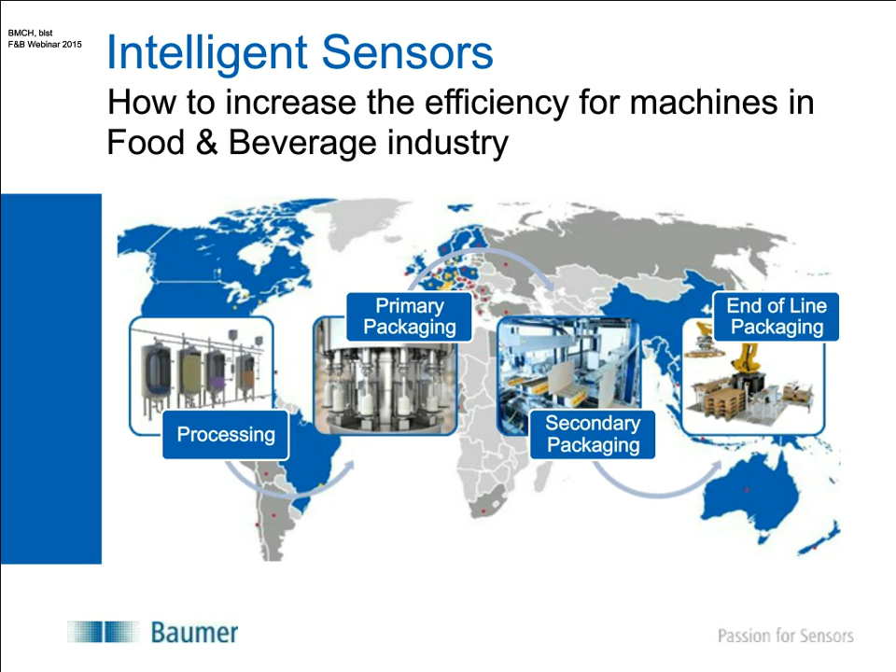During this webinar, you will get an overview of food and beverage, market drivers, the market in general from processing till end-of-line packaging, why hygienic design is so important and how to realize this in sensors. We also show you a dilemma between optimization and food safety, how to improve processes there. And during the webinar, I will also raise a question to you where we would like to hear your opinion.

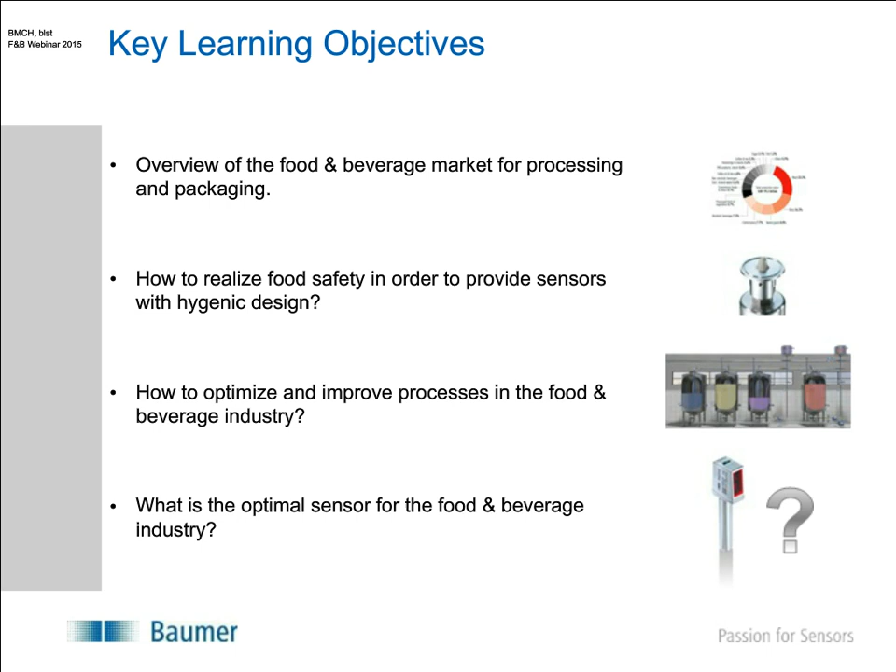But first, I would like to introduce our company, Baumer, with just 3 slides. Actually, Baumer is a sensor manufacturer of positioning and process sensors, as well as encoders, motion controllers, vision sensors, and also cameras. We are based in Switzerland. There's our headquarters, and we have 2,300 employees worldwide. Our turnover is about 400 million Swiss francs. And we have global coverage of the company with over 19 countries and 37 locations.

Baumer's definition of food and beverage is as follows. When we look, for example, on the dairy vertical process chain, we see from the left to the right the farming, the logistic, the processing, the primary packaging, the secondary packaging, the end-of-line packaging, and the logistics. Everything within the green box is, for us, the food and beverage area, which we are focusing on. You see a lot of different applications listed here, storing, mixing, blending, filtration in the different areas. We divide food and beverage into the process area, where the food is being processed, mixed and manufactured, and then into the packaging area, which is the primary, secondary, and end-of-line packaging. Each segment has a lot of different equipment there, and I'm coming later to these applications.

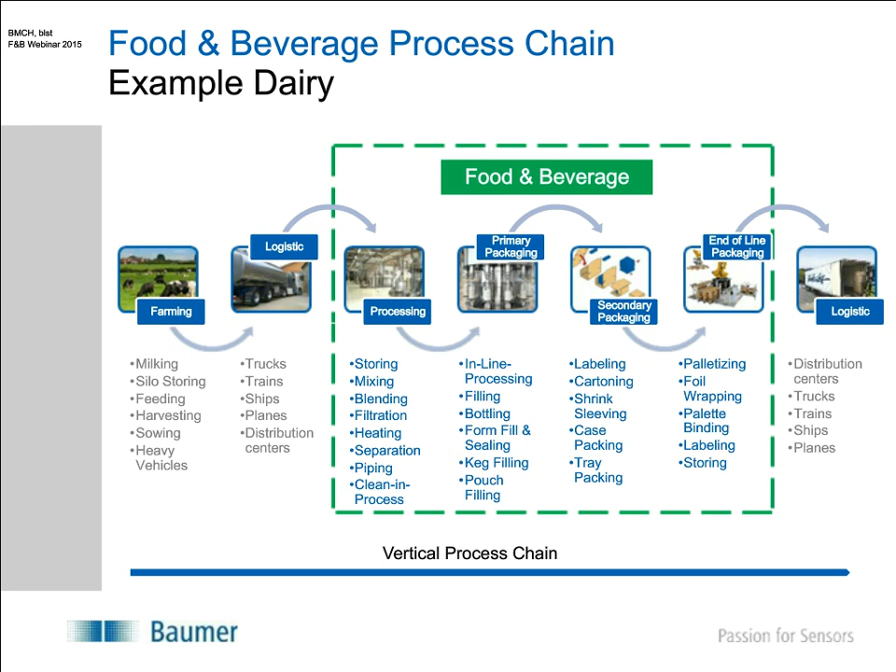But what influences this chain, and where does it come from, actually? Now I'm coming to the next slide, the main drivers in the industry. Here are some main drivers that influence the industry.

For example, since 1950, the world population grows steadily, and the more developed countries, as you can see here on the bottom, have a very slow increase till 2015, and up then stagnation. The less developed countries have a much higher increase. This will be the reason for doubling the population within the lifetime of a generation. The United Nations expects to reach more than 9.7 billion until 2050. That causes a lot of problems, of course, and efforts to feed all of us in the future.

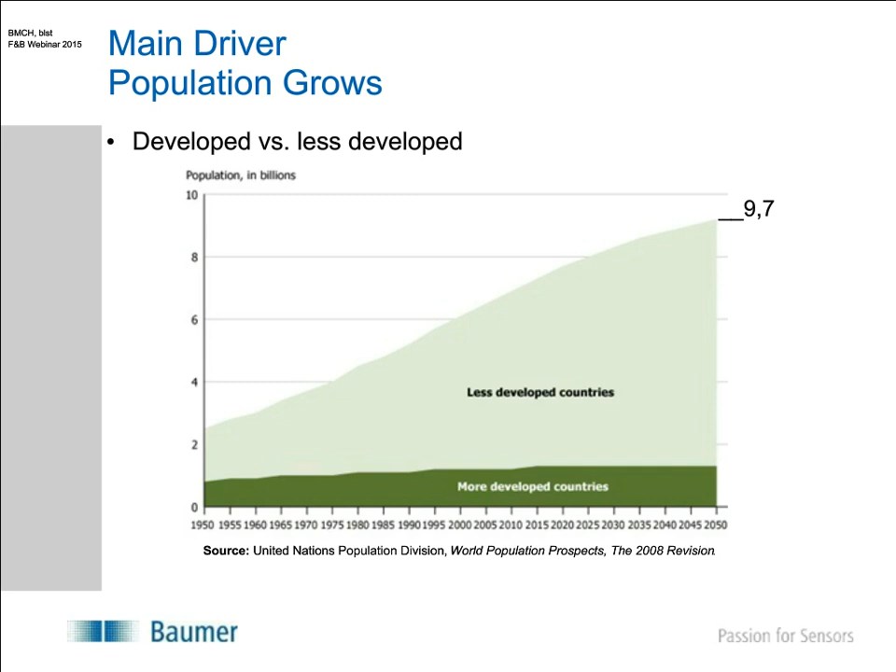So where are the less developed and where are the more developed areas? This slide will show you. Here you see an overview of the population development by regions. It shows clearly in the developing areas a much higher increase of the population than in the already developed regions. That means that we must think about regionally different models and solutions on how we will distribute food and how we will reach the people.

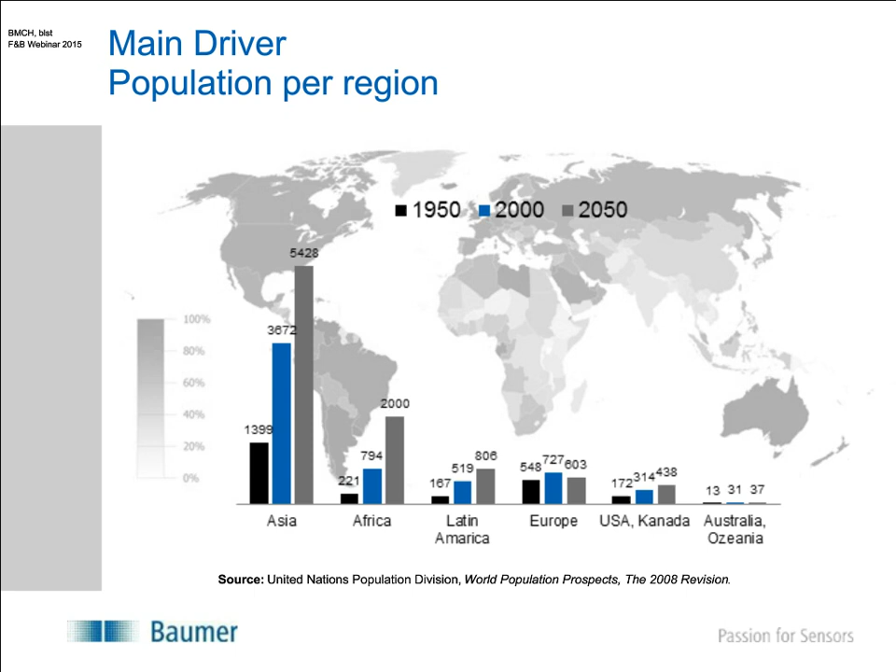During the next 5 decades, we will have a more older generation in the more developed countries and the younger generation in the less developed countries, as I said. That means we have to offer different products for each group, for each age.

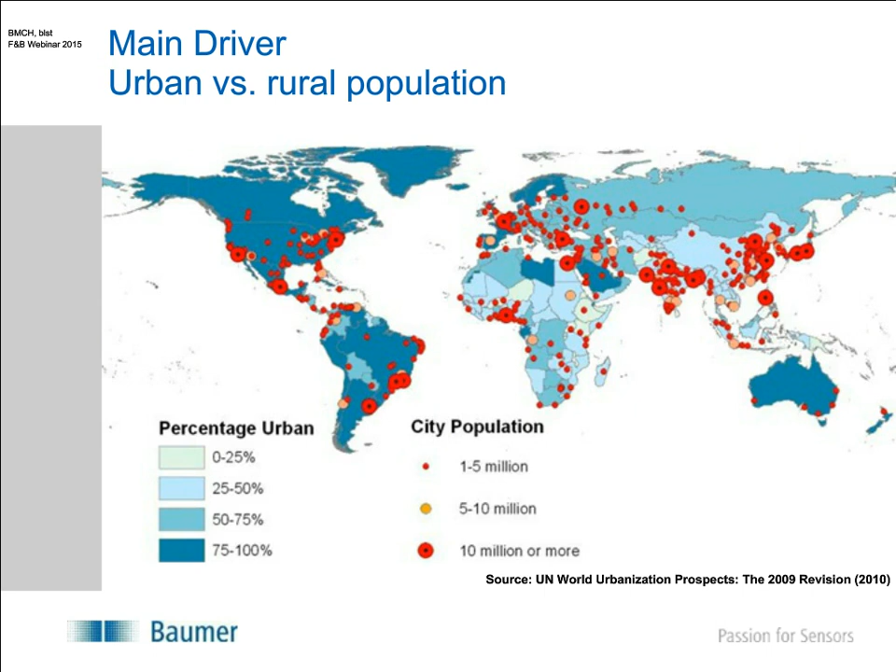At the moment, we are about 50-50: 50% of the world population lives in urban areas and 50% lives in rural areas. By 2050, the European Environment Agency predicts that over 75% of people will live in cities and only 25% in the countryside.

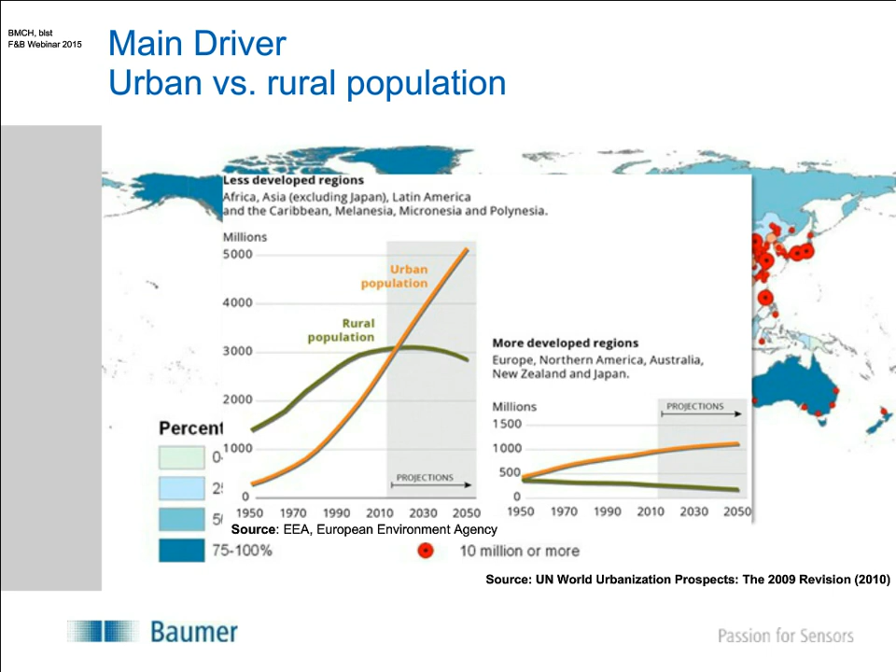Sensors will have more intelligence and also more value in the future, but food safety will steadily grow as the cost driver, because food safety is still the main topic.

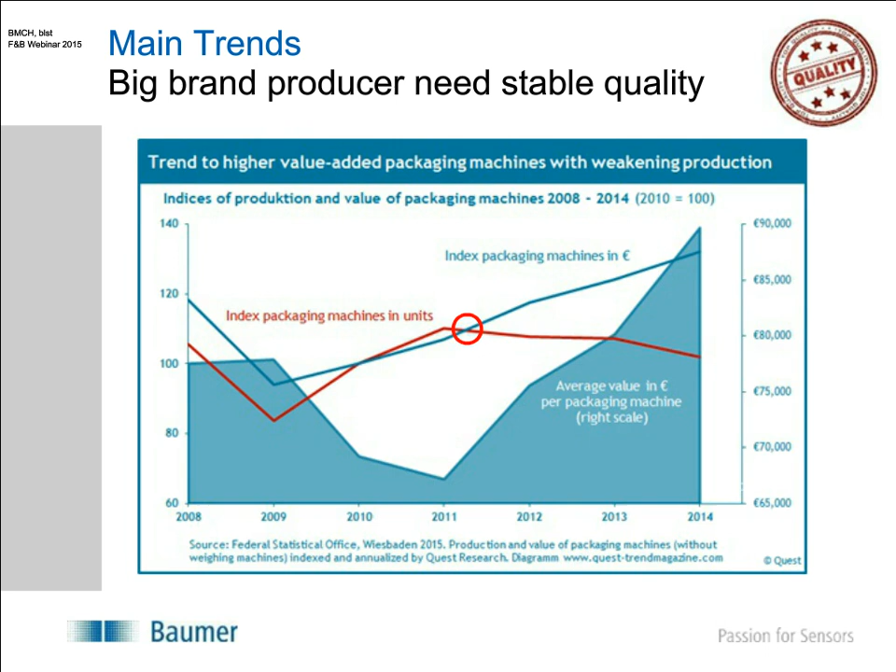Coming to food safety again, we'll see the food safety trends. Because the image for big companies is very important, it is also very dangerous to lose that image. So here are some examples of food safety problems that we had in recent years.

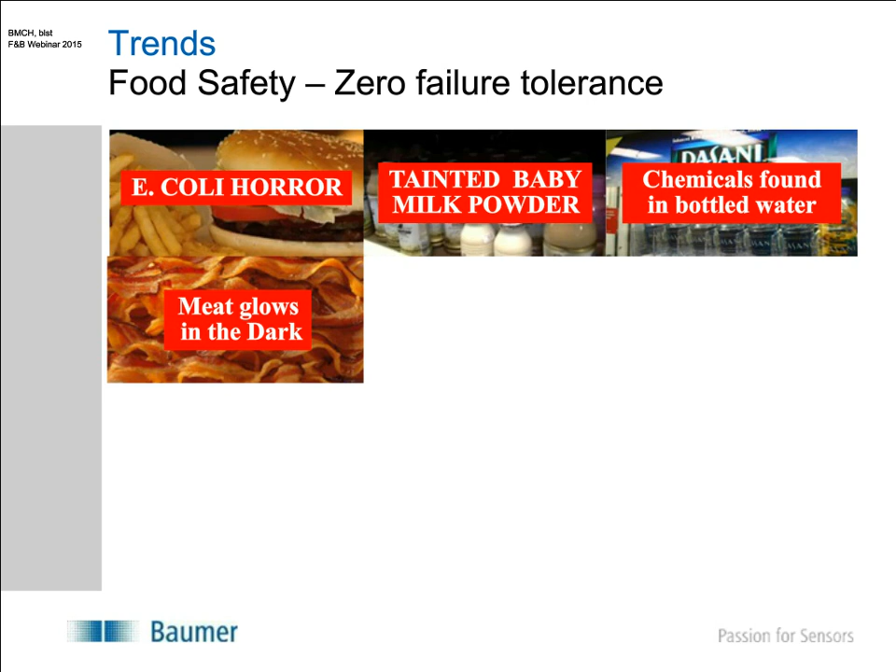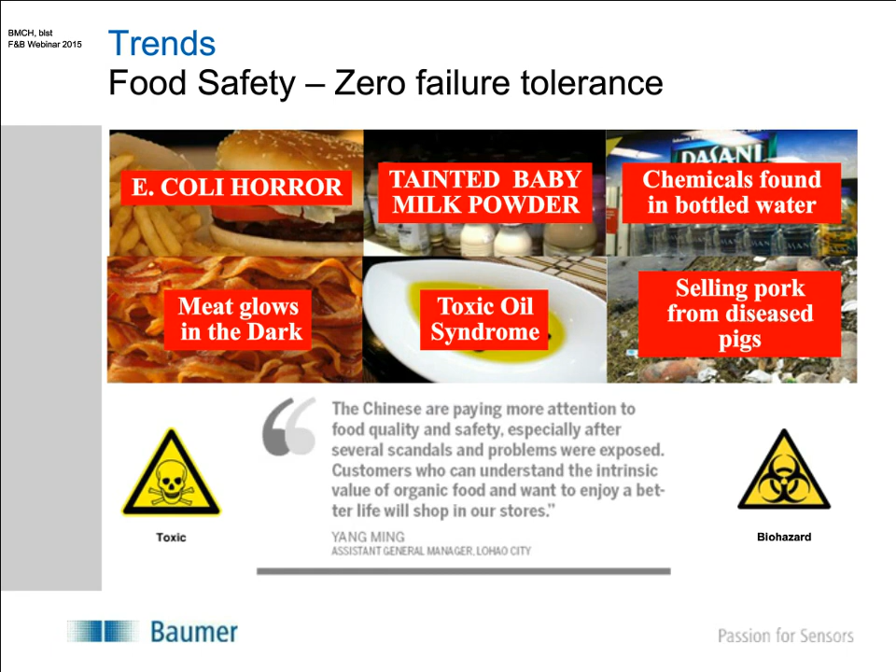So what are the conclusions, and how does this affect the OEMs or the machine builders, the end users, the producers, and also us as a sensor supplier?

Everything stays different. The future will have different demographics. Older people have a different food behavior than younger people, and more single-person households need to be focused on in a more individual way. Less time and different timing for meals causes the need for a changing distribution structure. Changing customer behavior will cause new eating systems, like McDonald's.

Less time for eating will mean also less time to prepare food. That means convenience will stay one of the main key trends. The share of ready-to-eat will grow, of course. Health and wellness will be more important. We will see more functional food, also in the beverage industry. Ethnic food and vegan food will grow as well.

What does this mean in terms of product variation, individualization, different product packaging, decreasing quantities, increasing demand of food safety, and increasing lost time in production? There is a big demand for solutions to fulfill these market trends.

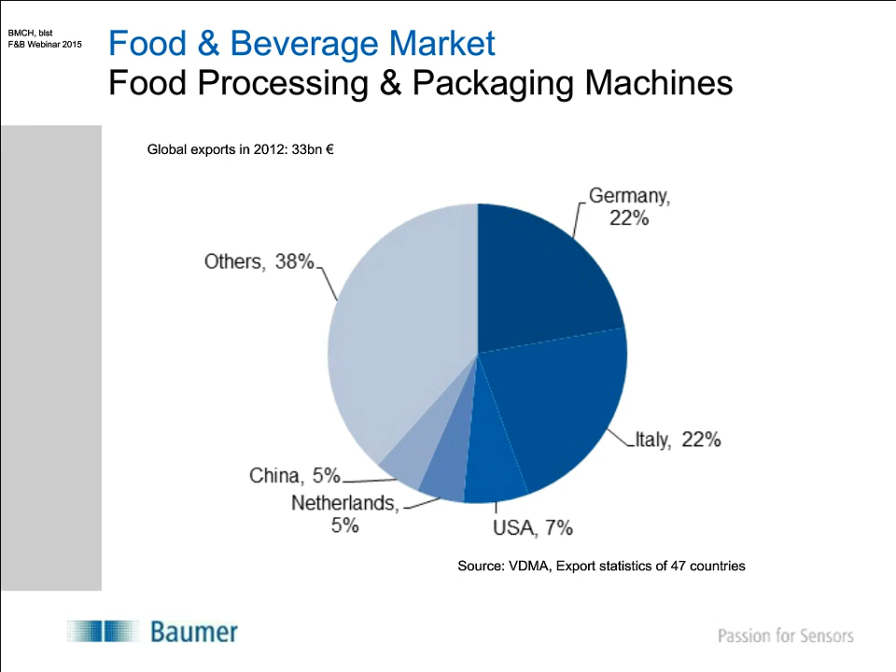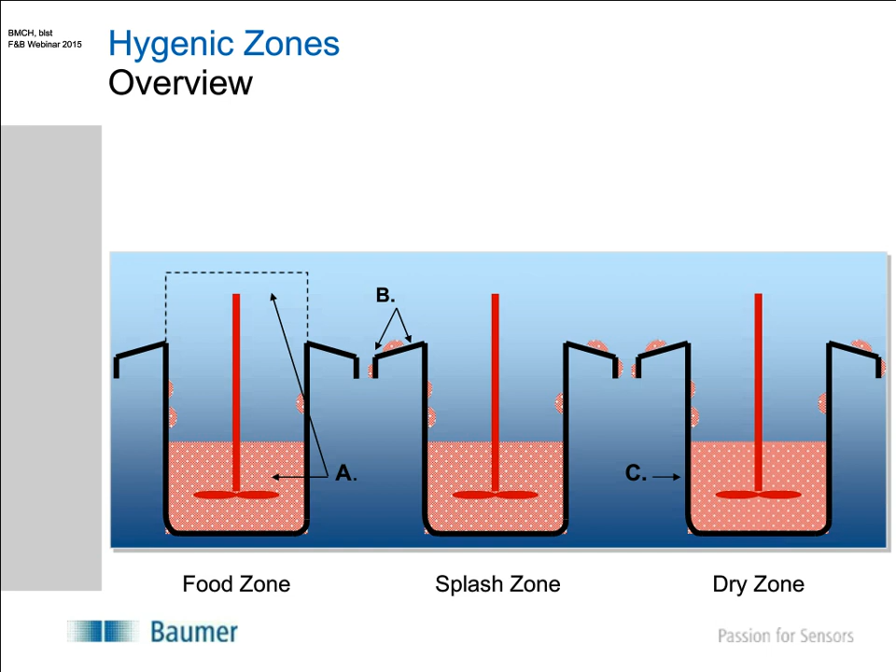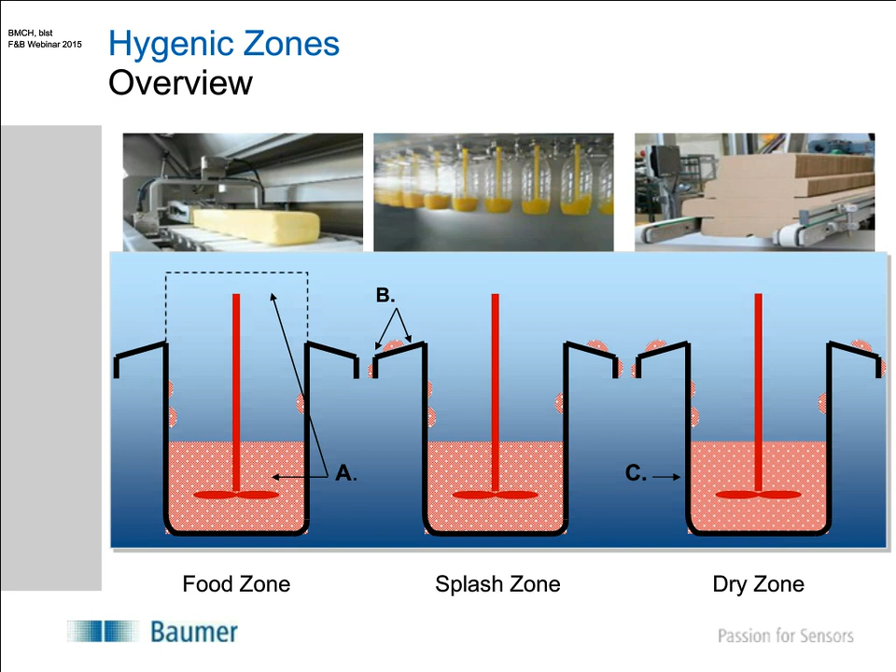So now I'm coming to the hygienic zones. I'm coming back to a more technical topic, and I would like to show you the differences between the three zones. In the food zone, the food is in contact with the equipment, as you can see here on the picture. In the splash zone, which is zone B, the food is usually already in the first package, but still open, here in a filling station. And in the dry zone, the food is completely closed, so there's no problem with contamination.

So in a more detailed view, I want to show you zone A. The risk of contamination is very high. Zone A has a very strong hygienic requirement. Here we have high frequent cleaning with cleaning agents. In Zone B, the splash zone, we have a medium risk of contamination. Cleaning is less frequent and less intensive. And in Zone C, we have no risk of contamination. Usually this zone gets only dry cleaning.

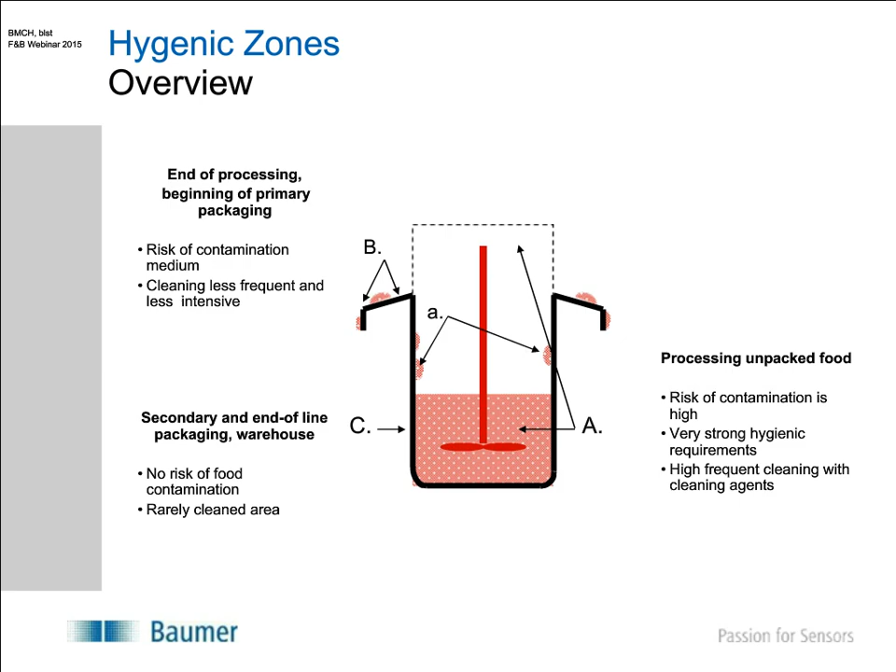So now I would like to hand over to Annabelle, because there is now a question coming for you.

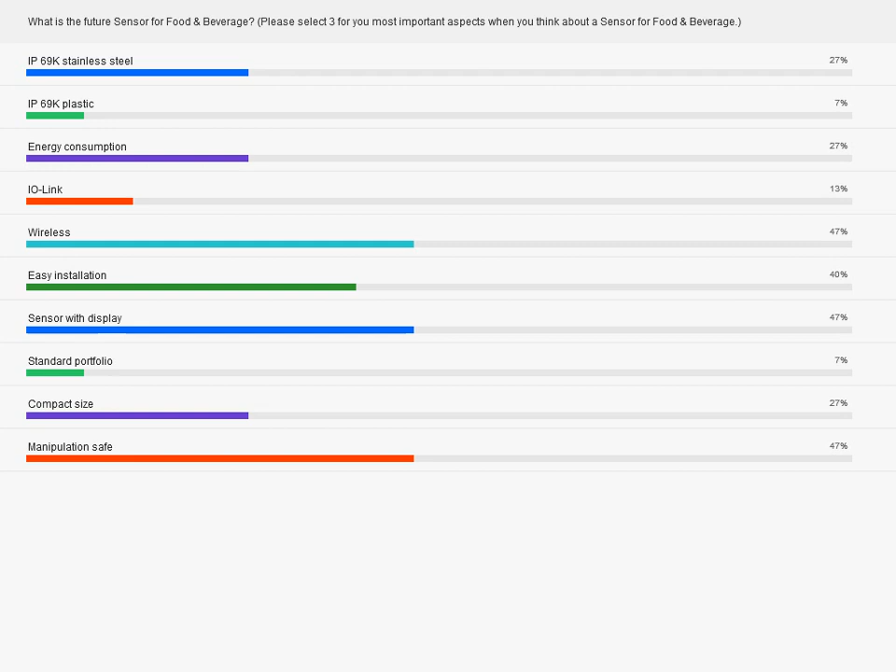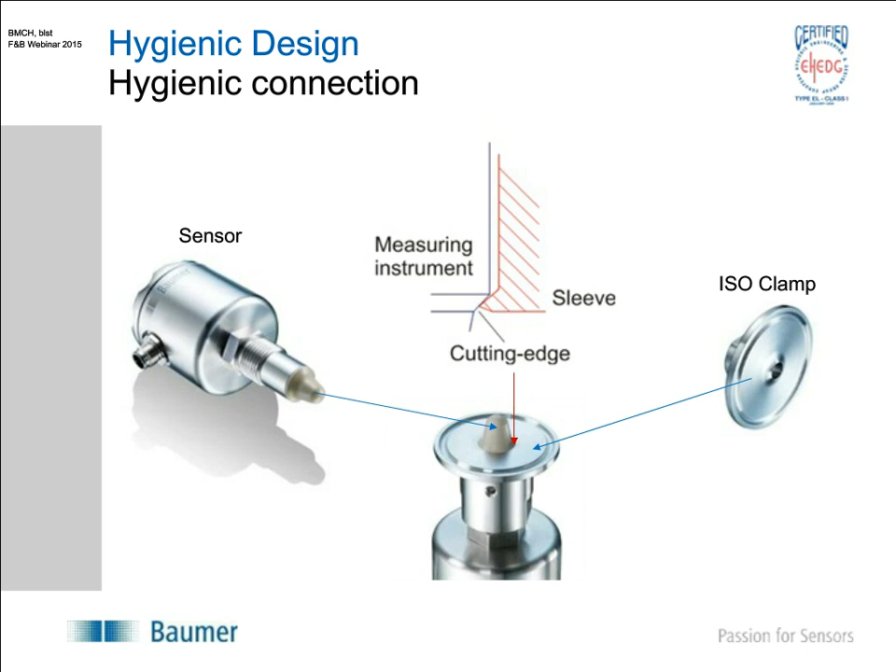Due to different requirements from different segments, from the meat, dairy industry, and so on, and also from different countries, we offer an extensive portfolio of hygienic process connections. You need these connections in order to put the sensor in each application, and they may be used by producers as well as end users.

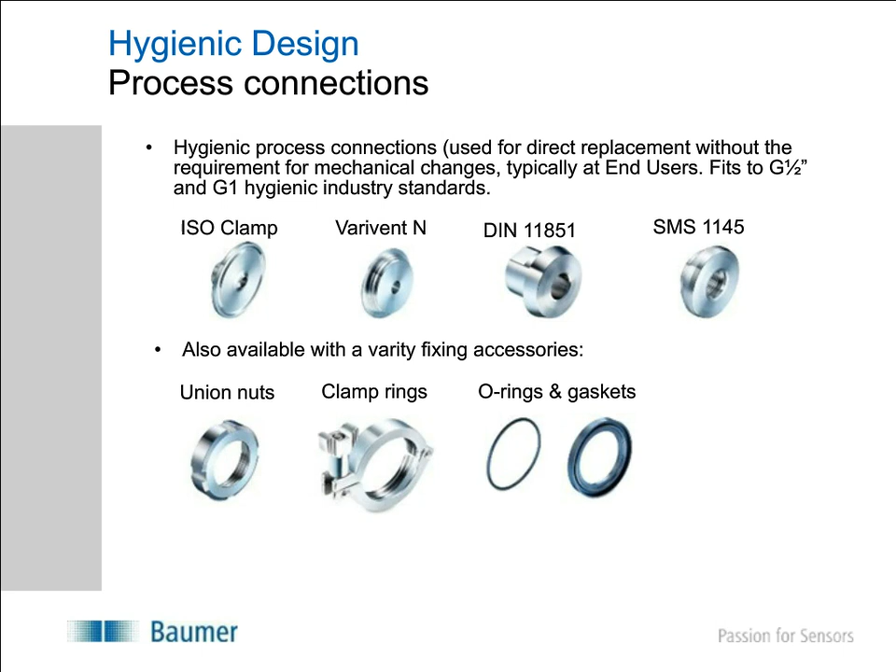For OEMs or machine builders, we have welding connections to exchange other sensors. There are also adapters available, where you first screw the sensor into the adapter, then install the complete sensor adapter system in the application, for example in an ISO clamp. And then we are done.

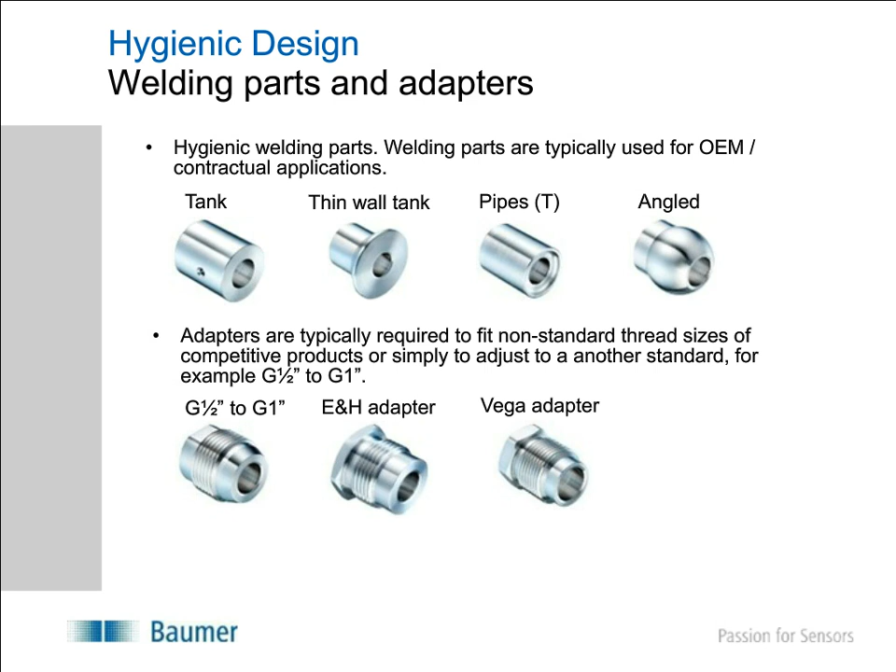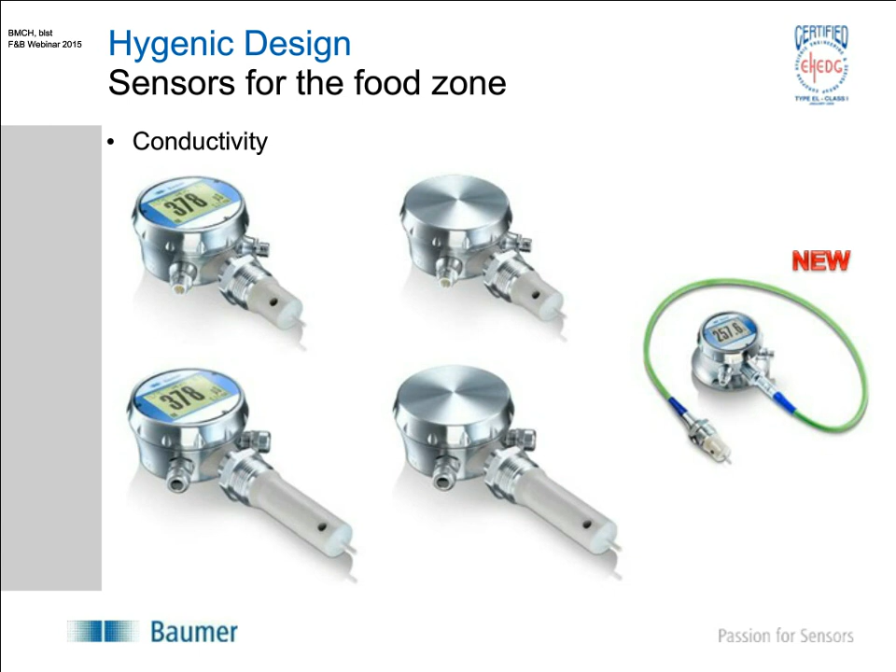All of our process sensors, here for example our conductivity sensor, work with some kind of adapter principle. For example in CIP equipment, clean in place, which is the next slide, an application from the food and beverage industry.

Clean in place is equipment in the food and beverage industry used to clean many production lines without disassembling. In production, there is always a dilemma between reduction of energy costs and food safety. On one side, treatment with high temperature over a long term increases food safety, but on the other side there are costs of lost energy, resources, and money.

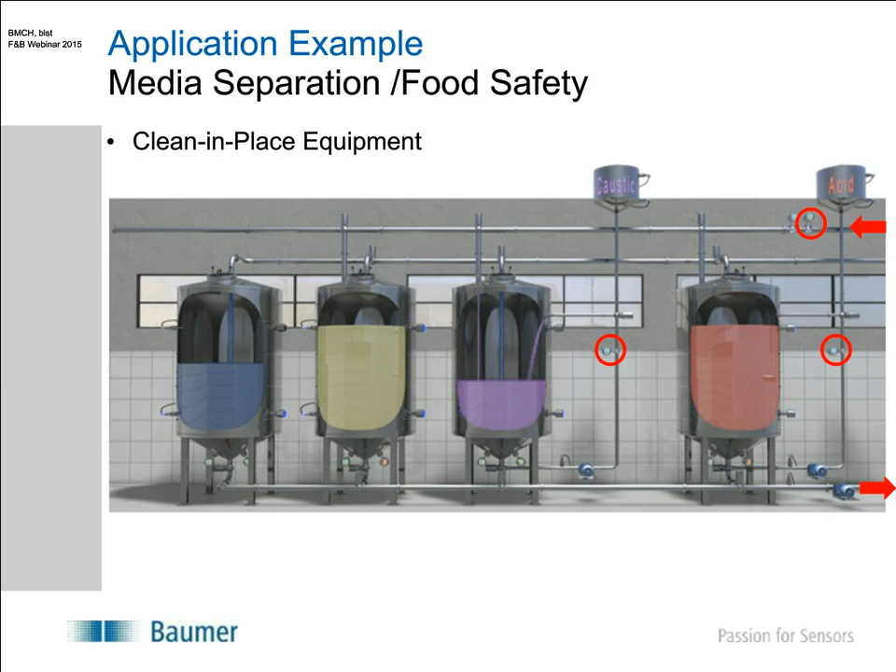I'm now coming to the next product principle, the magnet sweep sensor. This is a level sensor, or what we call clever level. It's a sensor to detect the level of liquid and also solids due to their DK value. It can even detect the difference between foam and liquid, and many applications can be solved with this sensor. I'll show you some major ones where the product gives a real benefit.

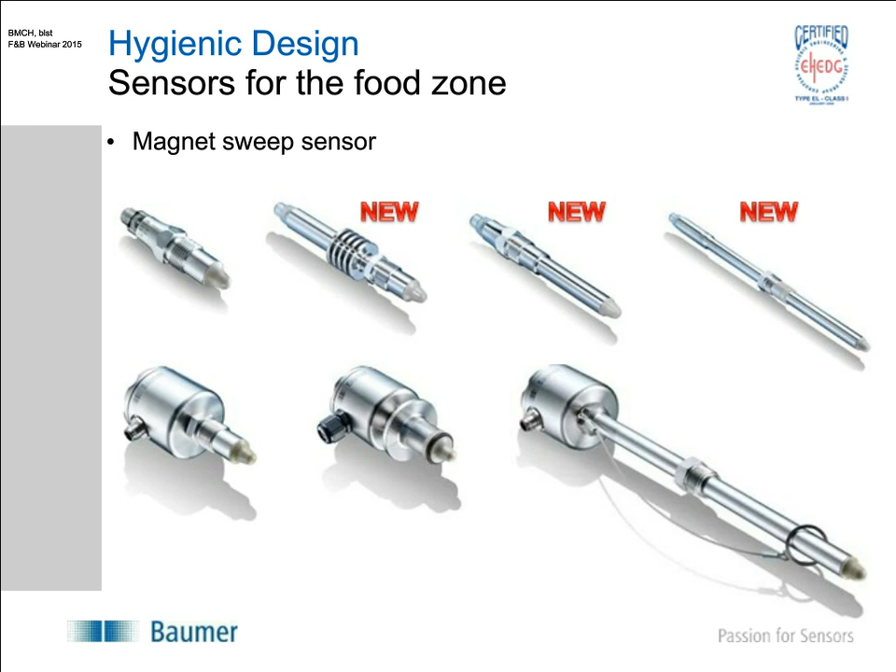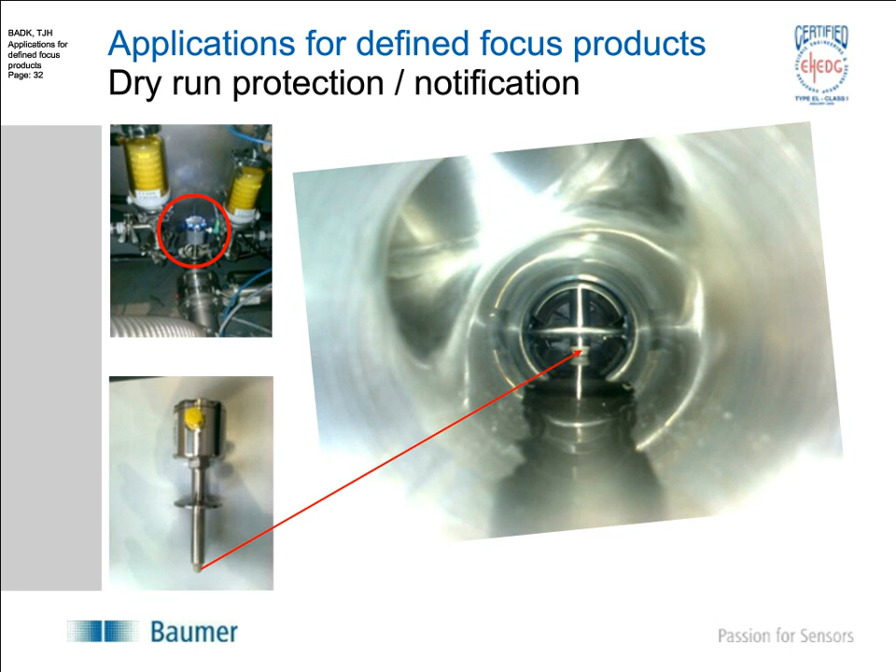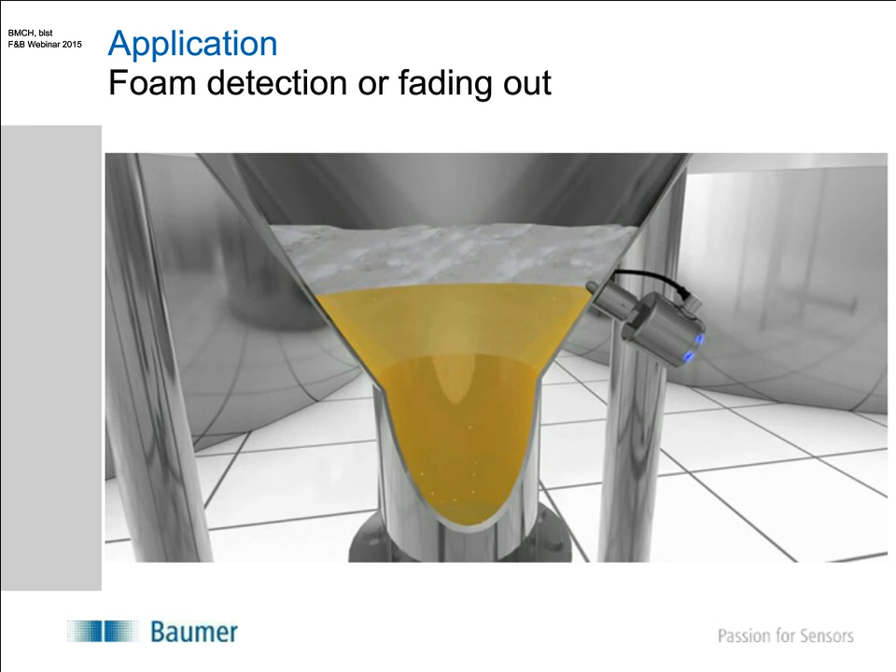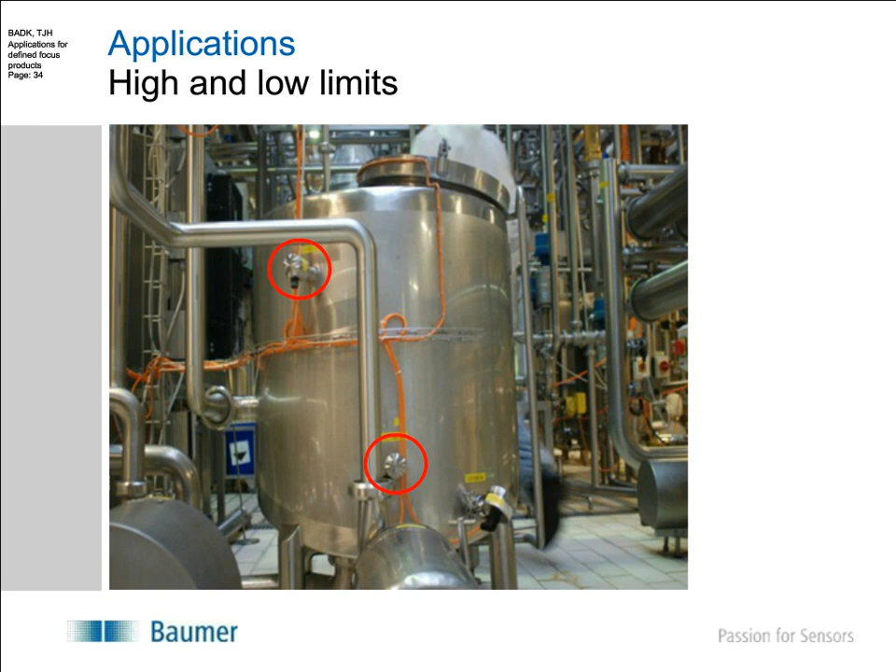Here is an application example from a tank where you detect overfilling and low level. Here you can see on top, foam coming out, just as an example. When you have the sensor inside and parameterized for foam, you can detect the foam and have no overspill with the sensor. So the process is safe, especially when chemicals are involved - you don't want foam coming out.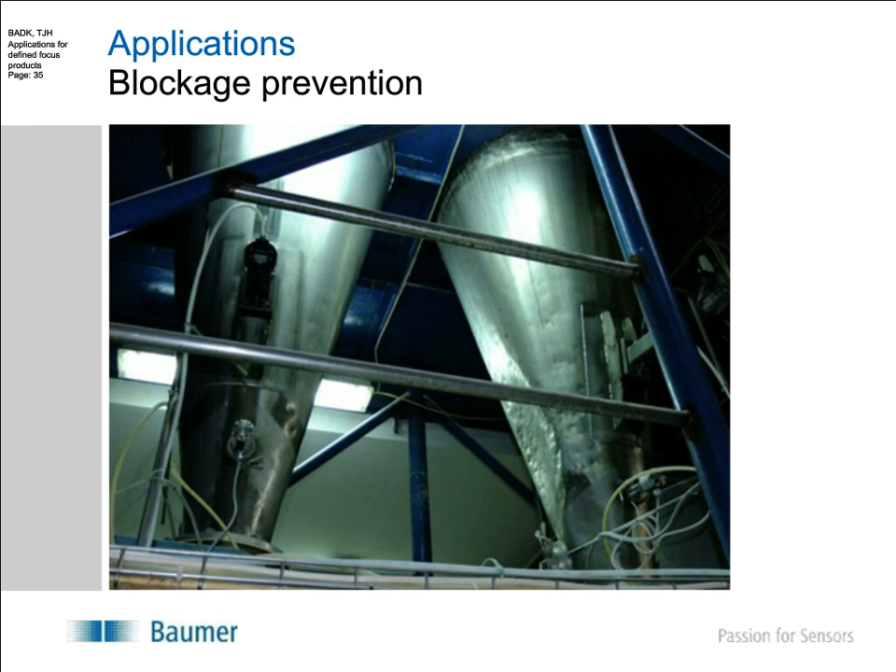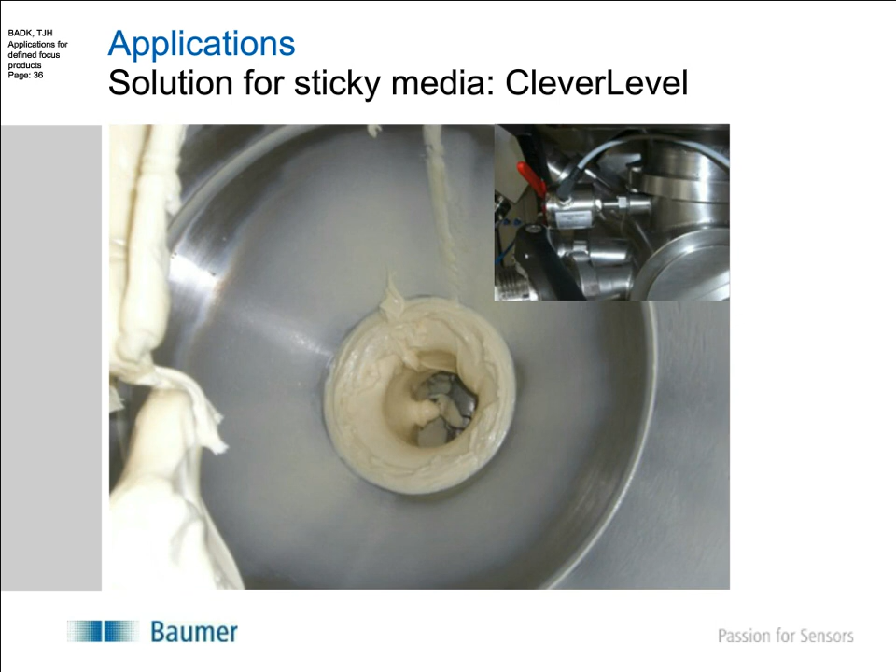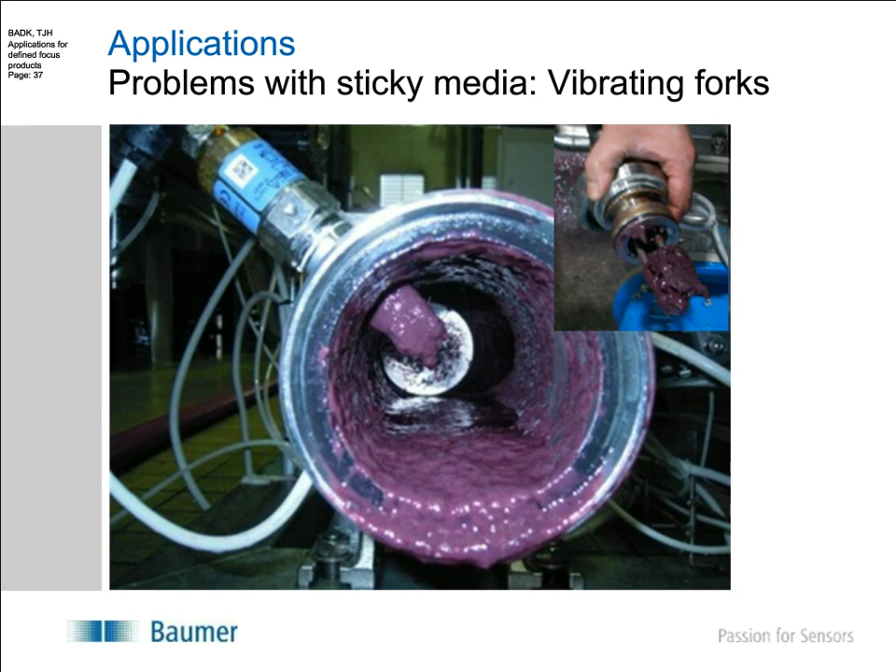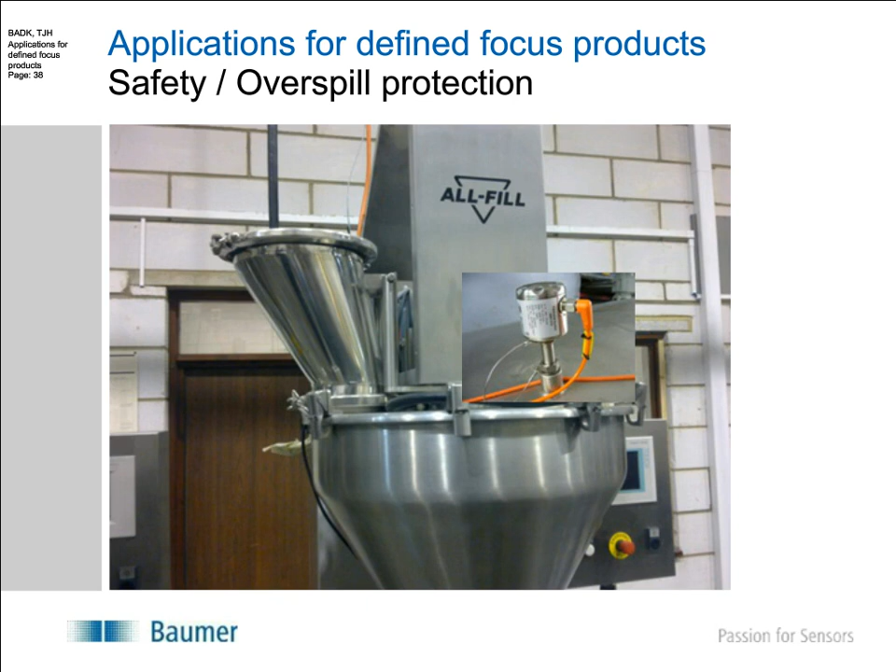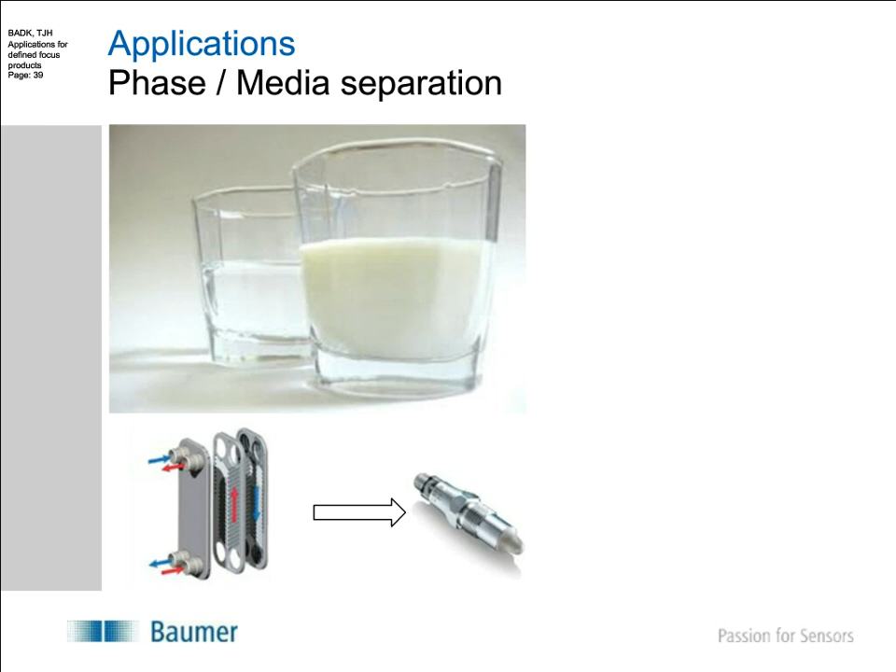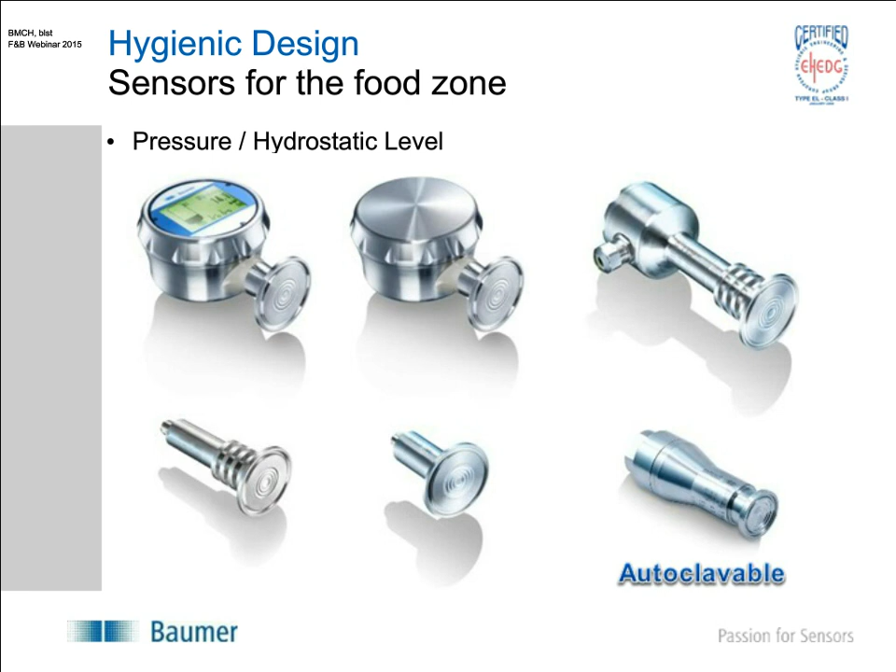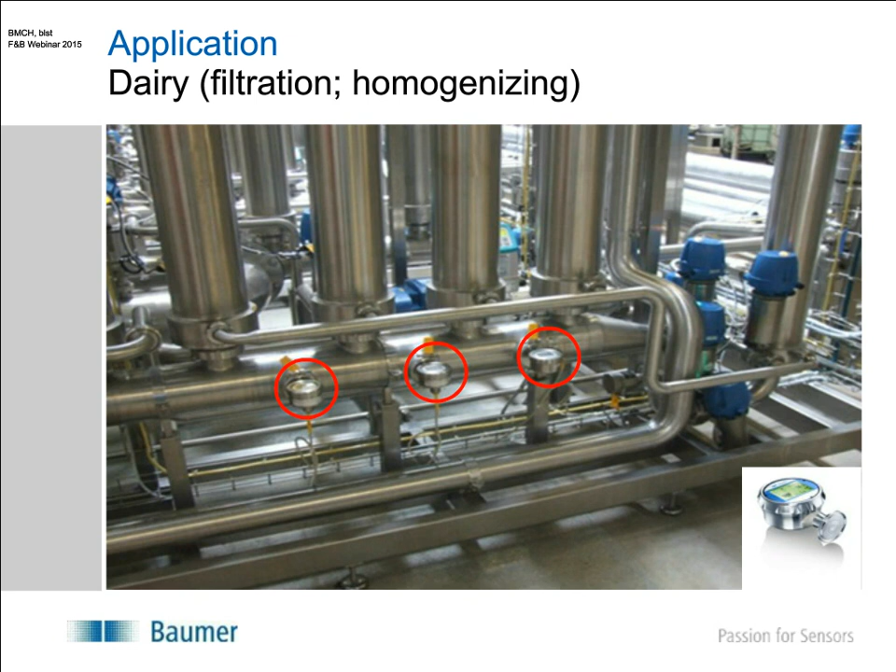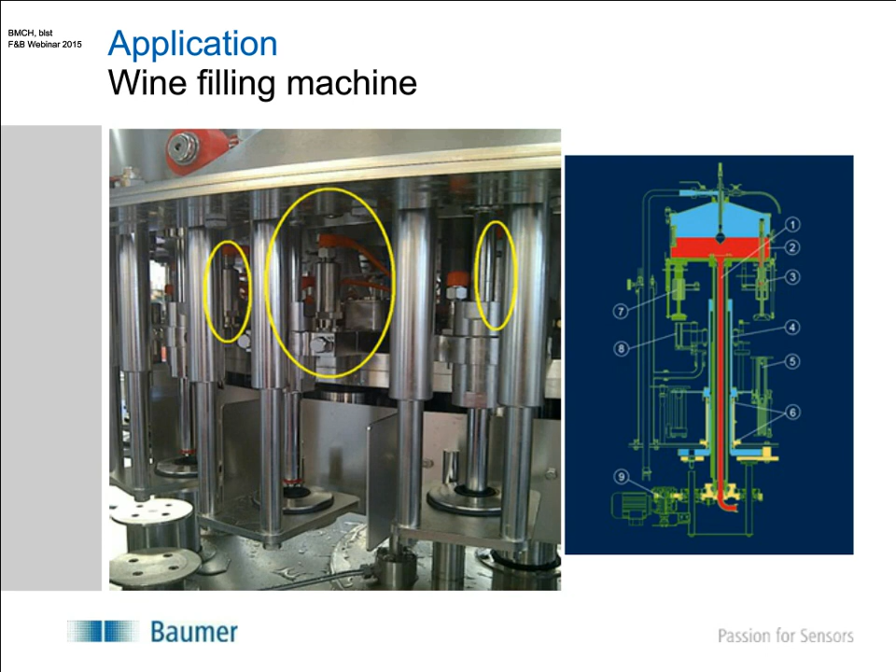And here we have an application of a spirits filling machine. This is on the top of the filling machine, a picture, and it measures the head pressure inside the ring tank in order to be sure here is a safe atmosphere, always present due to food safety.

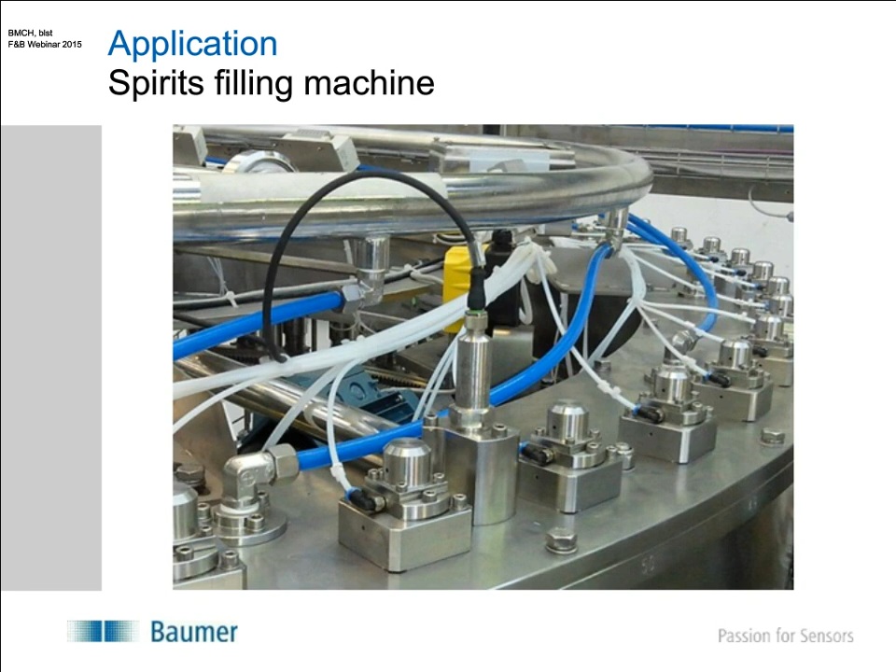So now we come into temperature sensors. There are different kinds of temperature sensors, also with display and without display. Here are some hygienic temperature sensors, also on the right corner, new lines. At the bottom shows us a new concept with higher hygienic responsibility.

Last sensor at the right is a front flush hygienic sensor. This can be used for many applications, where there is a paddle in a boiling tank, for example, or a mixing tank.

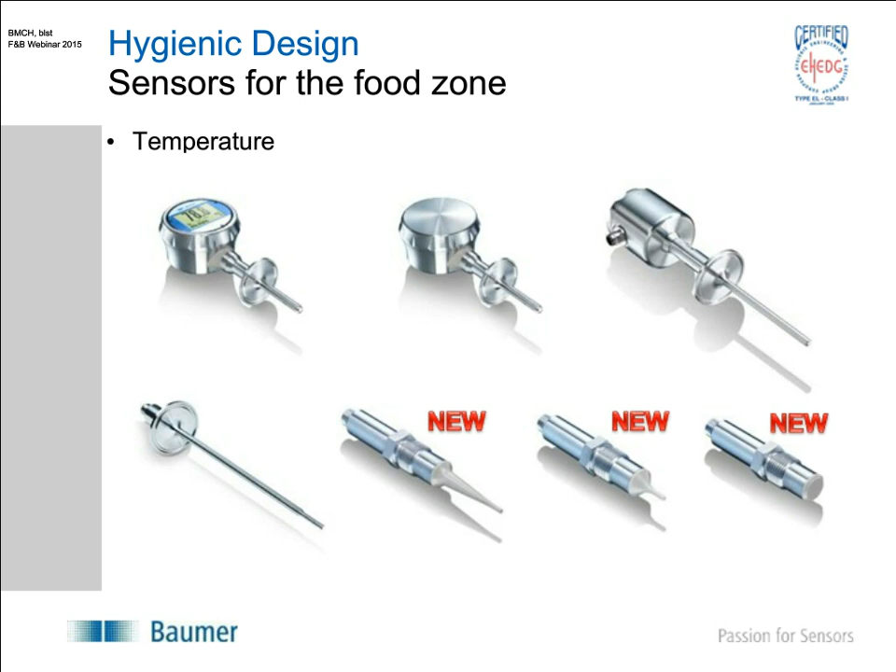Also coming back to this clean-in-place application, temperature is a very important information inside this to monitor in order to reach enough food safety, because temperature must be reliably measured and stored. And this sensor has even a display who can show the operator if there is a problem.

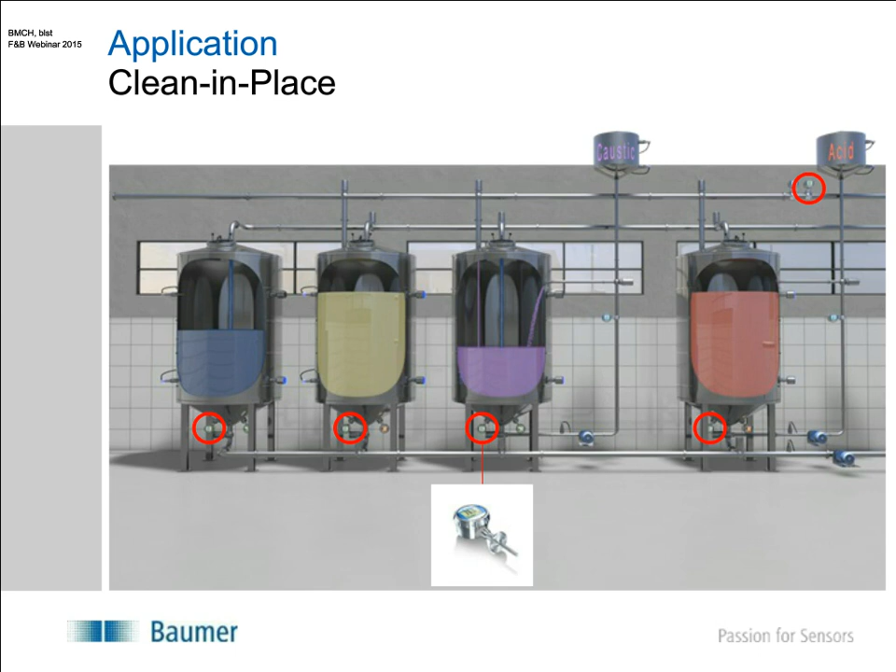So now we're coming to positioning sensors, to our optical sensor line, and you see here an evolution of optical sensors over the last years to develop a modern and standard hygienic design sensor.

On the left you see the older version, on the right the new version, and due to the usage in the food zone, it has a special housing made of stainless steel and a special mounting device. The sensor was really developed to have no gaps, no holes, no sharp edges, and radius to avoid areas of bacteria growing. This is the hygienic design in optical sensors.

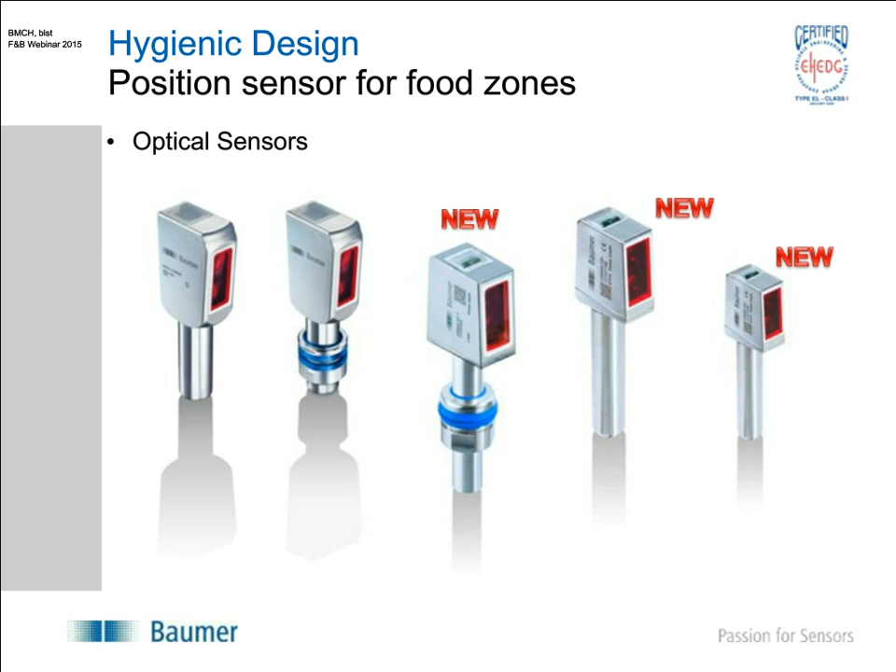Now we're coming to the accessories for food zones that we have in positioning sensors. Here you see on the left side hygienic mountings, which we use to mount the optical sensors, for example. And in the middle we have hygienic reflectors.

At the top, a real reflector, and below, just the pole - just a metal part - is called a smart reflector. I'm coming to this later in an application where I will show you that Baumer has developed this smart reflect technology in the food and beverage industry, where you don't need a real reflector.

Then a teach pen. It's a magnetic teach pen for hygienic teaching, and the cables, the hygienic cables.

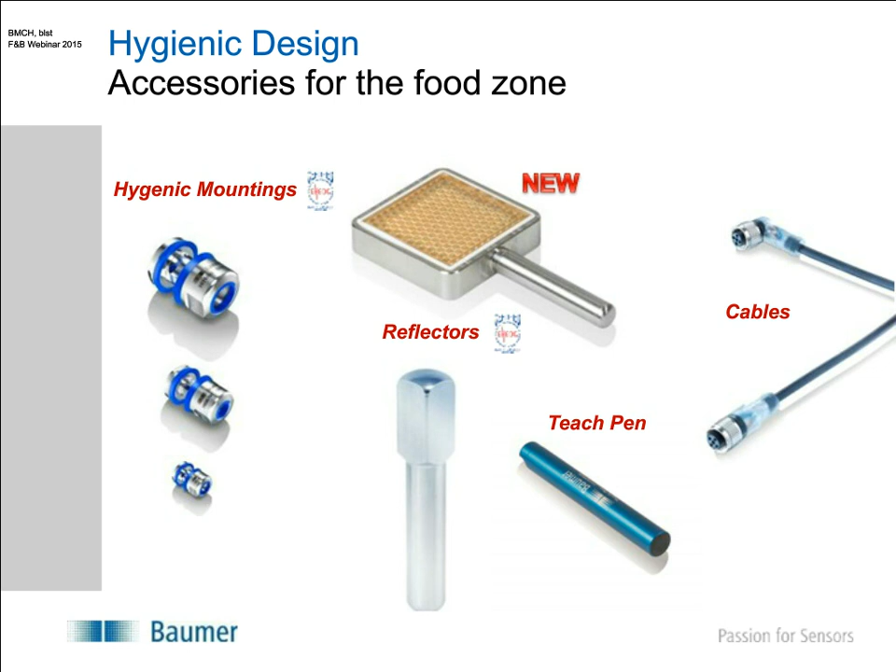So here you will see now an overview or an introduction of how sensors get taught with hygienic design, because we have no teach button. It's just in the back, an area where we can hold this magnetic pen, and you have then a teach process started, but only when you have this pen, and only in the beginning when you set up the sensor. After it's set one time, you cannot change the settings.

This is the good thing about manipulation safety. And this sensor also provides IO-Link. Actually, all of our new sensors provide IO-Link also, so you can remotely parameterize the sensor.

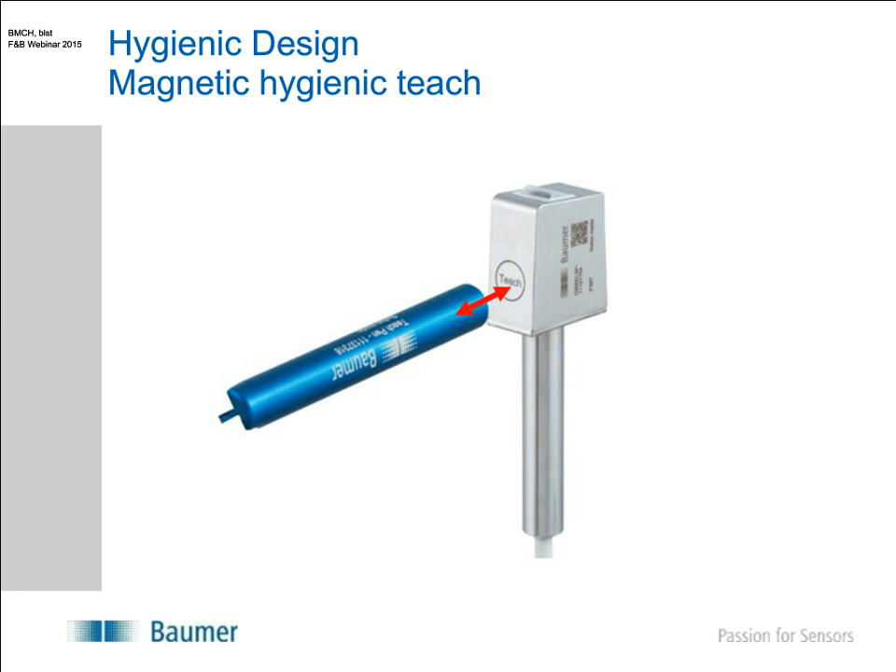Here is another application for positioning sensors where we use this smart reflect technology, where you see we look at the wall of the machine housing, and this is our reflector reference. So the sensor doesn't need a real reflector - we just use the housing of the machine as a reflector.

You see how it is installed with the hygienic mounting. And also here we have a very special sensor which detects transparent trays where the tomatoes are inside.

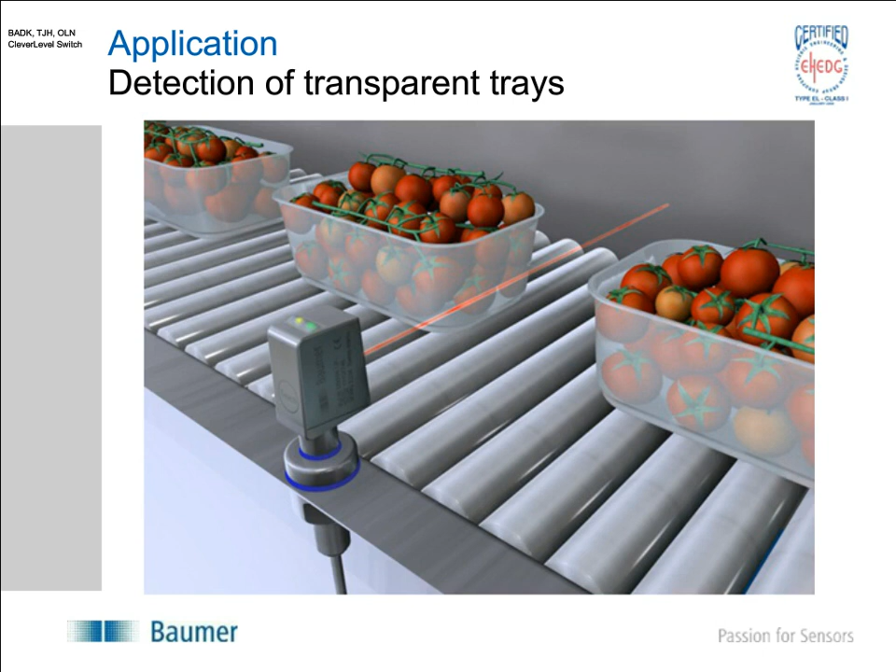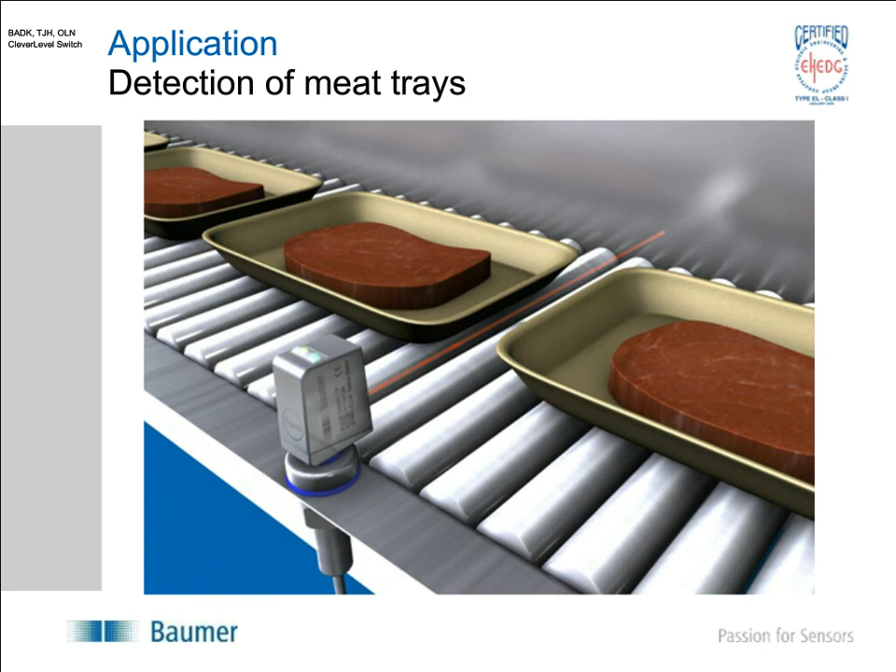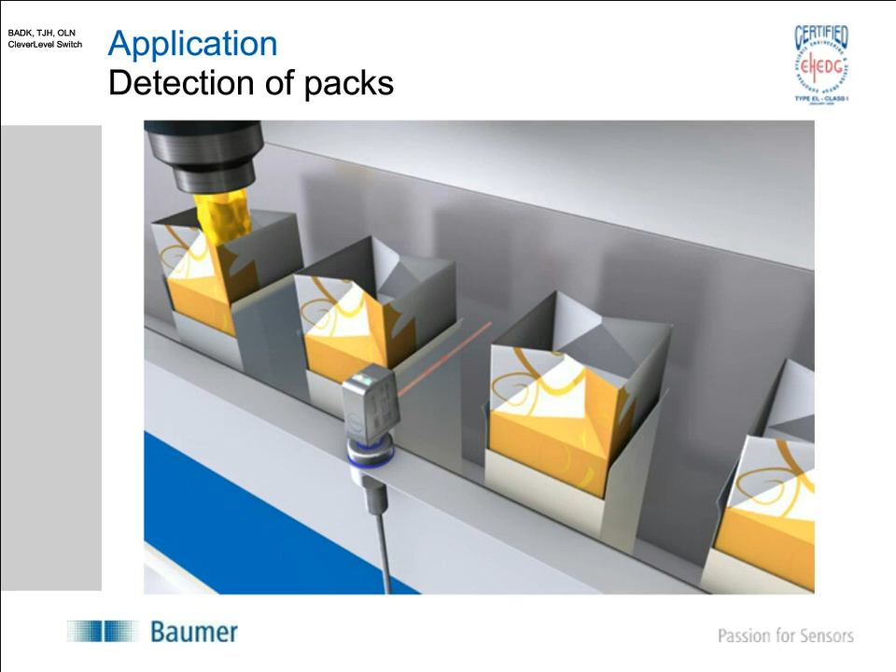Next, we have an application from the meat industry where we detect not transparent trays. It's basically a very similar application, but here you also need hygienic design. And in the filling area of a dairy or juice manufacturing company, where you have high hygienic standards because it's fresh, you also have this application.

Here you have a very special version of this sensor. This is also a smart reflect sensor where we use the conveyor belt as a reflector. So our conveyor belt is the reflector, and we detect everything which is on the reflector. It's actually also possible for transparent material, so we can detect a transparent tray also from the top with a moving conveyor belt.

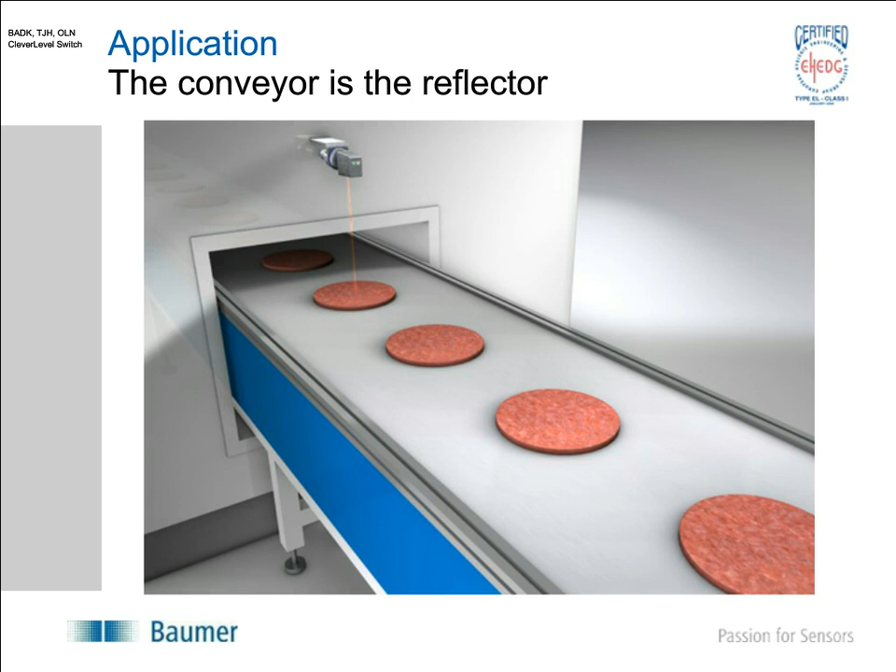Now I am coming to maybe a little bit more unspectacular sensors: inductive sensors which detect metal parts. These sensors also have a hygienic housing. As you can see, we use these hygienic connections to fix the sensor in the machine. Same thing.

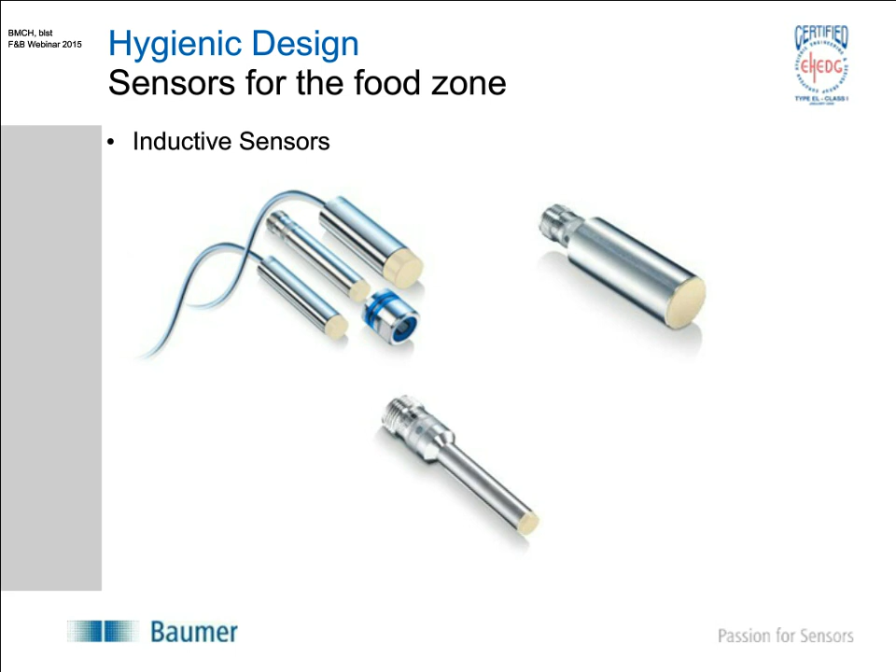Here you see an application, for example, for the measurement of meat thickness, which is an indirect measurement via this mechanical installation. This measures the distance of the metal part above the sensor, and we give an analog value out, and you have the thickness of the meat.

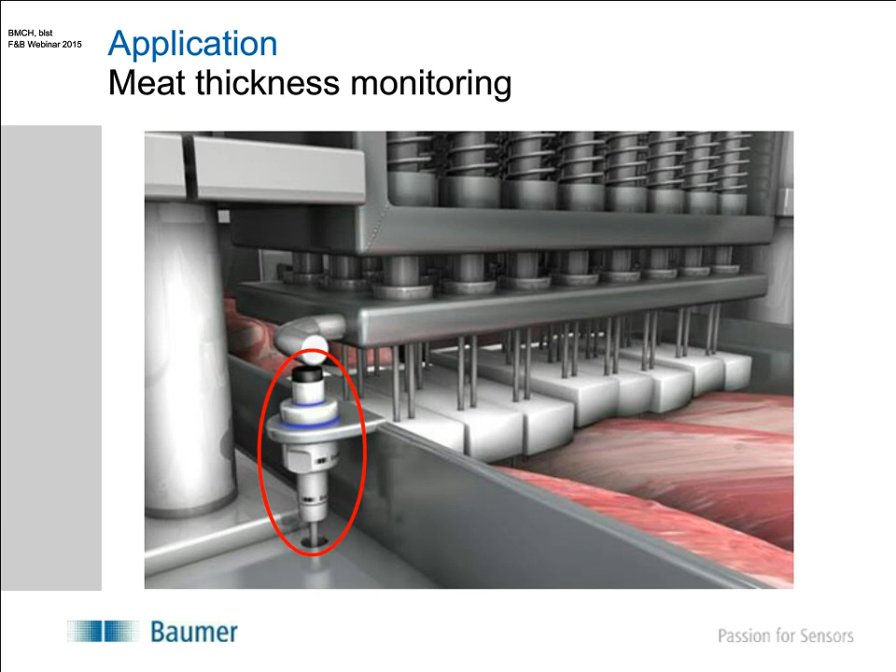And now for completion, actually I am speaking about hygienic design today, but we also have sensors for the splash zone, for the B area, and here you can see these sensors. They have holes, and you can screw them in. They have edges. It's just a different housing.

These sensors are a little bit cheaper, but they can withstand very high temperature, very high pressure, chemical resistance, IP69K without a problem. And we developed an even harder test, which is like a trademark or a stamp for us, Protect Plus. It's really a reliable sensor in this environment. We have special tests for that.

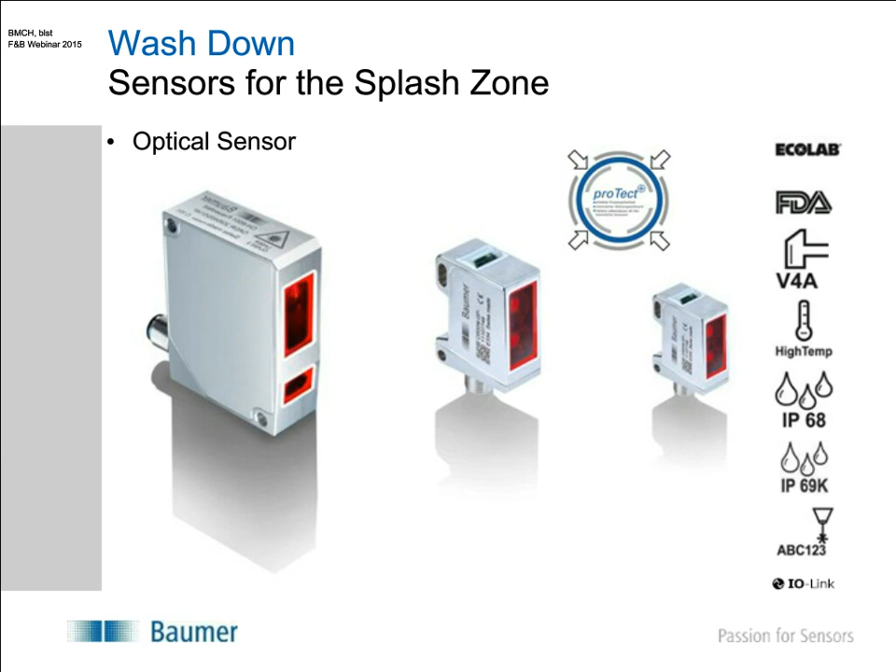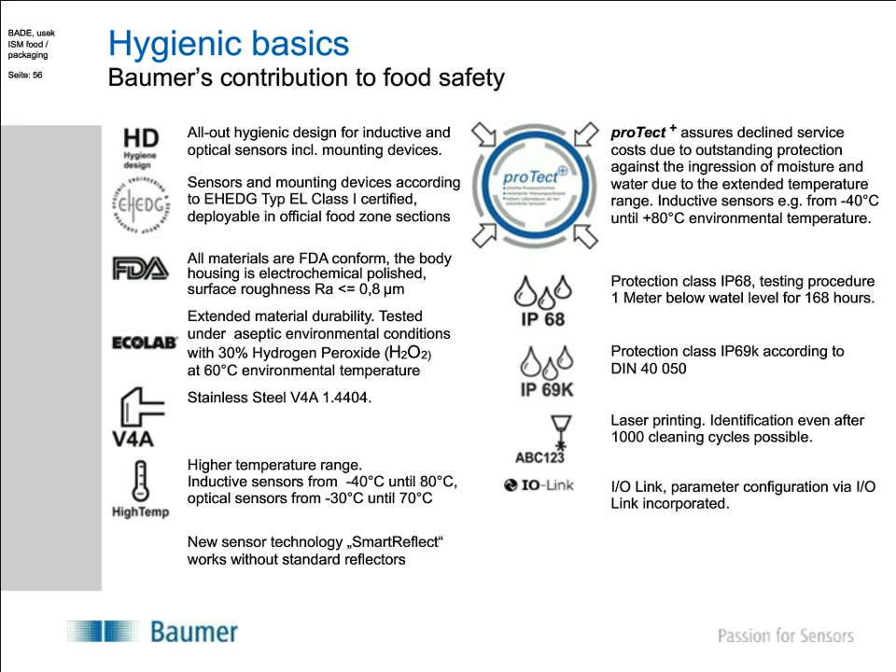All sensors that we use in the food and beverage area have different labels: the hygienic design label, for example the EHEDG label, which comes from the dairy industry, basically FDA qualified materials, Ecolab certification regarding chemicals and cleaning agents. Then the V4A stainless steel housing, high temperature resistant, IP68, which means the sensor can be put long term below one meter of water level for 168 hours, and IP69K is protection against very strong cleaning, and IO-Link as well.

So now I'm coming to the end of the presentation of the webinar, and I would be very happy if you have questions that I can answer. Thank you very much.